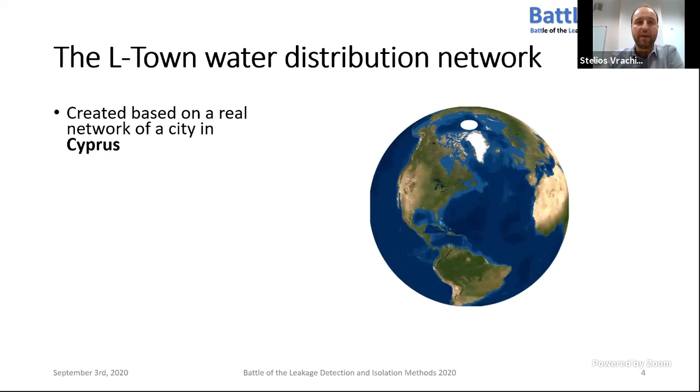I will begin with the description of the battle challenge, which concerns the L-Town, a water distribution network created based on a real network from a city in Cyprus. This network covers an area of approximately 10,000 people. It has 42 kilometers of pipe length, 2.6 by 3 kilometers width, several junctions and pipes, and for the purposes of the competition, the pipes were divided into 50-meter segments.

We have created the base demands of this network based on the real network. For each node, we assign the polygon in the real network, and we find the building area in this polygon. We then find the type of consumers by collaborating with the water utility for each building, and the base demand for each node is calculated by multiplying the percentage of this consumer type in the polygon times the consumption per building area of the consumer type times the building area.

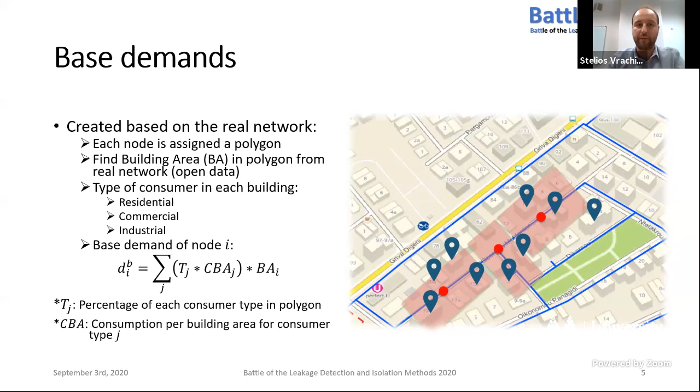The demand patterns were also created realistically based on the real network. First, we created 2 nominal patterns, a residential and a commercial, extracted from real data. However, each node was assigned a unique demand pattern by randomizing these nominal patterns as described in the LeakDB benchmark, which is cited here. We also assigned some industrial patterns which were derived from real AMR data.

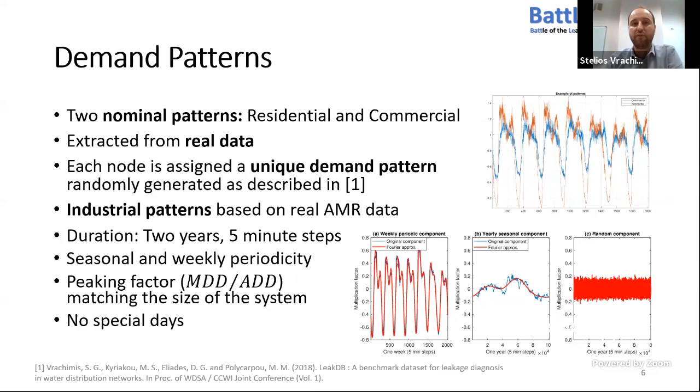The duration of the patterns was 2 years in 5-minute steps. We have a seasonal, yearly, and a weekly component periodicity. We also took into account the peaking factor, which is the maximum daily demand with respect to the average daily demand, so that it matches the system size. For this competition, we did not assign any special days in the patterns.

For the competition, we had a nominal model and a real network model. The real network was used for generating the data for the competition. The nominal model, given to participants as an EPANET input file, contains the available network information. The difference between the two models is that in the real model, the base demands were randomized uniformly between plus minus 10% of the real value.

The nominal residential and commercial demand patterns were available only in the nominal model. However, as we said, different patterns for each node were used in the real network, and also industrial patterns were not available. However, they are measured by AMRs. The pipe parameters again were randomized uniformly between plus minus 10% of the real value. For this competition, elevation and pump curve uncertainty were omitted to reduce problem complexity.

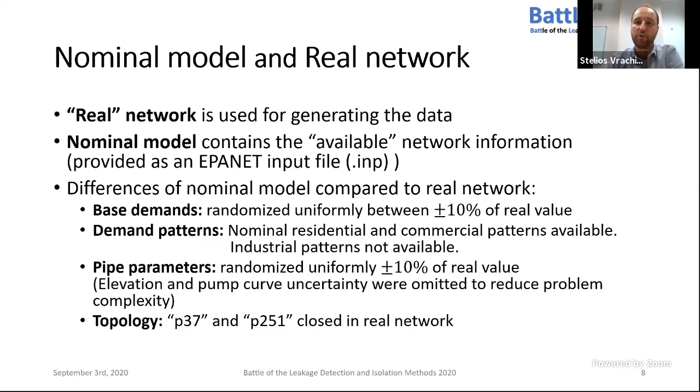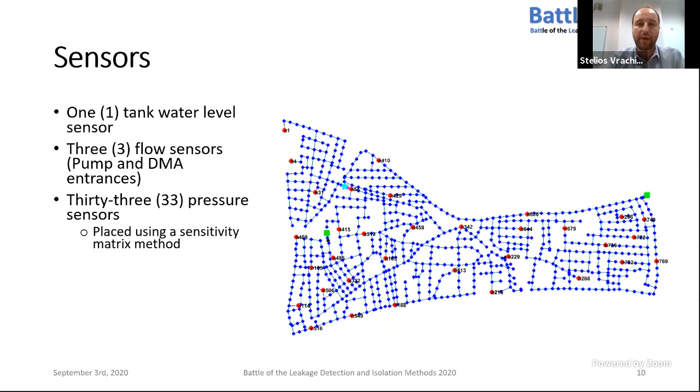The sensors assigned in this problem were one water level sensor at the tank, 3 flow sensors, 1 at the pump and 2 at the DMA entrances, and 33 pressure sensors shown in the figure here, which were placed using a sensitivity matrix method. We have also 82 automatic meter reading devices in area C, which were used to measure this area, and also the industrial consumers shown here in green.

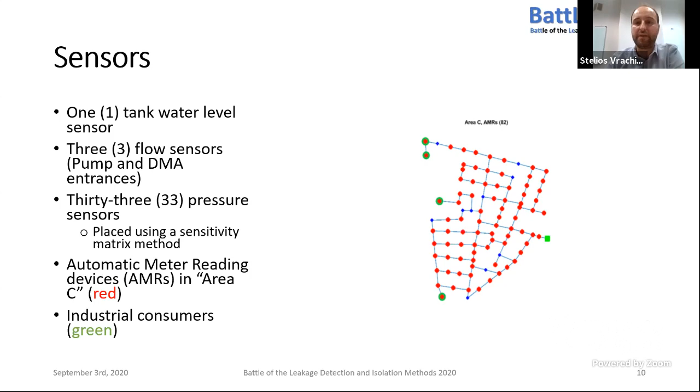The sensors give accurate readings with no time delay in order to reduce problem complexity. However, the readings were rounded to 2 decimal points, so this was adding some uncertainty into the measurements. We have 2 datasets, the historical dataset of 2018, which contains 1 year of sensor data, and also the time and repair location of pipe bursts that have been fixed by the water utility. The evaluation dataset, the one on which the participants were evaluated, contains only 1 year of sensor data.

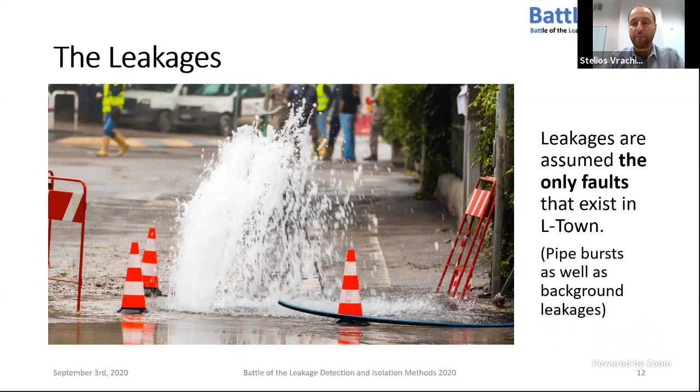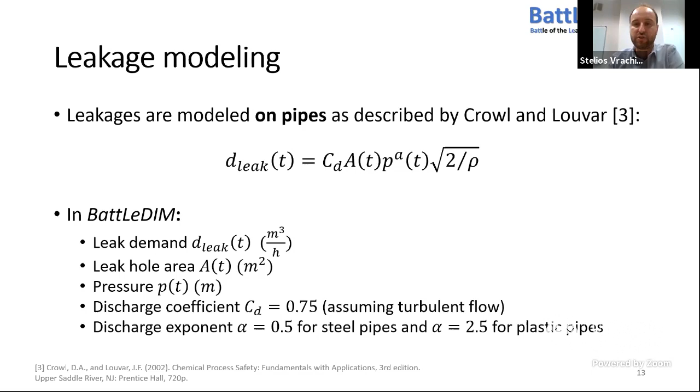There were 3 types of leakages categorized depending on their magnitude in the competition: background leakages, medium pipe bursts, and large pipe bursts. These were categorized based on their percentage of the average system inflow. Large and medium leakages, that is above 15 cubic meters per hour, were assumed to be detected and fixed by the water utility after a reasonable amount of time, with a maximum of 2 months.

Leakages were also assigned a time profile. There were abrupt leakages that begin abruptly and remain at their maximum hole value, but there are also incipient leakages, which increase gradually from their start time until a peak time, at which point the leak hole remains at its maximum value until the end of the leakage.

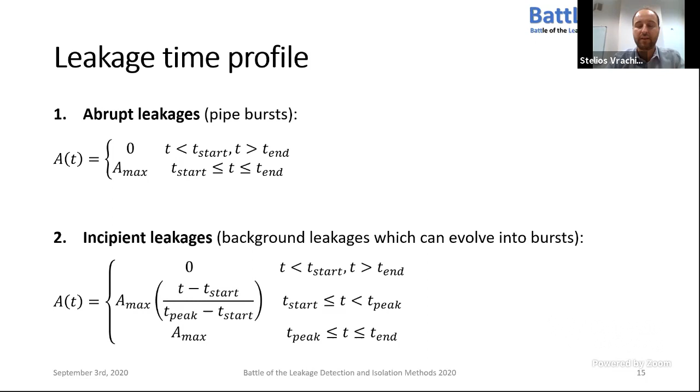For this competition, we used also a leakage placement algorithm, which places the leakages randomly, however, with some constraints. We place them constrained on the maximum number of leakages in a year, and also a minimum time between leakages which overlap. The leakages which overlap, meaning that the detection radius around the leak, which is from where the detection is considered successful, is 300 meters in this competition, and we assigned a minimum 2 weeks between leakages that overlap. This is to ensure separability of the faults.

Leakage characteristics were also selected randomly with constraints. That is, we have a predetermined number of background, medium, and large leakages, a predetermined number of abrupt and incipient leakages, where incipient peak time is selected based on the leakage type and magnitude.

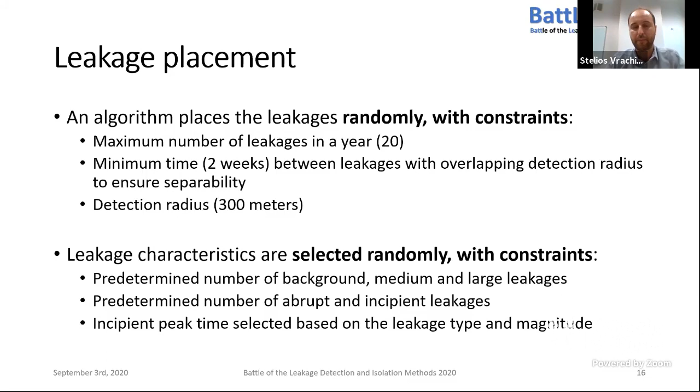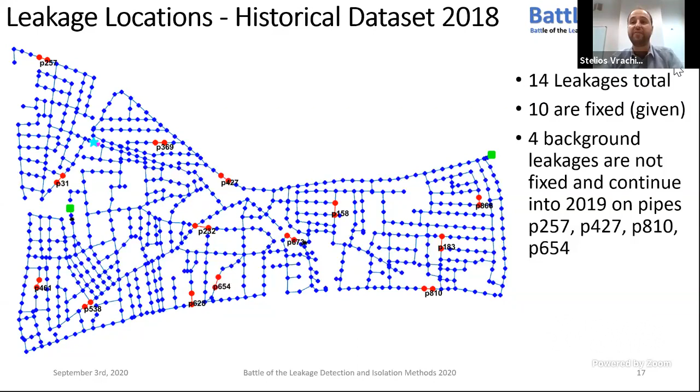Now we proceed to the evaluation dataset leakage locations. These are the leakages and the solution of the BattLeDIM competition. There were 23 leakages in total. 4 begin and continue from 2018, while 19 of them begin in 2019. All these leakages are evaluated in this competition, whether they begin in 2018 or 2019.

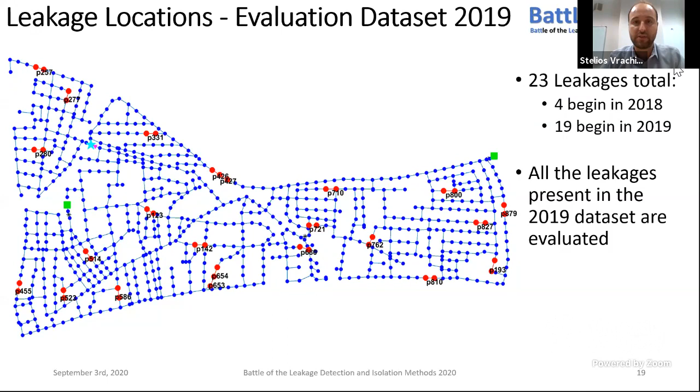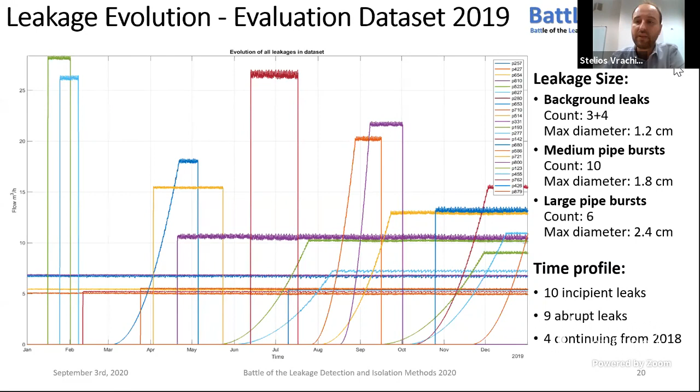In the next graph, we show the evolution of these leakages. We have leakages of different size, background leaks: 3 of them begin in 2019 and 4 of them continue from 2018. We have 10 medium pipe bursts, 6 large pipe bursts, and also the time profile of these leakages varies. There are 10 incipient leakages, 9 abrupt leakages, and 4 continuing from 2018, so they are continuous. We now proceed to the evaluation methodology.

For this competition, we follow a pure economic approach for evaluation of the participants. That is, the water utility of L-Town calculates the profit from water saved from successful detections. Also, the utility considers the cost of the repair crew every time it is sent to search for a leakage. We want to note that the selected methodology was chosen by the organizing committee as the most suitable for this competition. However, alternative methodologies have also been considered and will be described in a future journal paper.

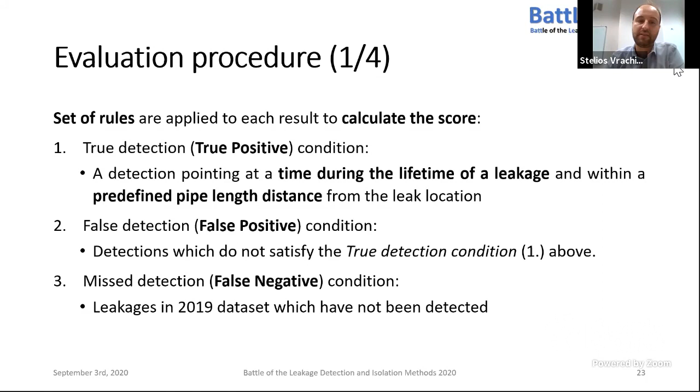A set of rules will apply to the results given by the participants to calculate the score. First, we define the true detection or true positive condition. A true detection is a detection pointing at a time during the lifetime of a leakage and within a predefined pipe length distance from the leak location. A false detection is a detection which does not satisfy condition 1. Missed detections are the leakages in the 2019 dataset which have not been detected.

The detections are evaluated in chronological order, that is, from the earliest detection until the latest detection given, and this is for the leakages that may overlap. Detections outside 2019 are ignored, so we do not penalize any detections that were given with a date not in 2019. Also, repeated detections of the same leakage are ignored, as we have cases where the same leak was detected multiple times. We only consider the first detection of this leak, and the rest of the detections are not penalized.

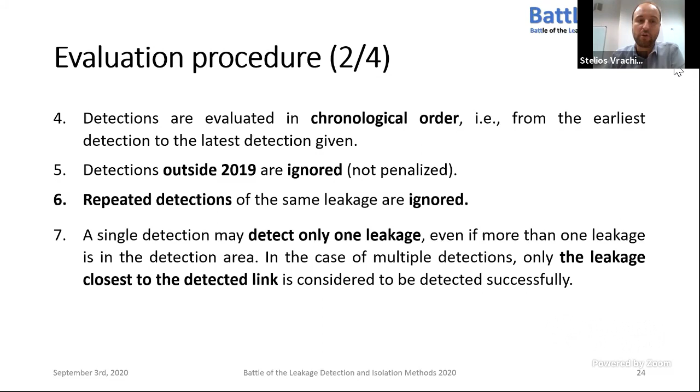A single detection may detect only one leakage, even if more than one leakage is in the detection area. In the case of multiple detections, only the leakage closest to the detected link is considered to be detected successfully. The profit from water saved from a detection is calculated by finding the volume of water saved from the detected leak, from the detection time until the end time of the leak. The volume of water saved is then multiplied by the cost of water per cubic meter to calculate the total profit per detection.

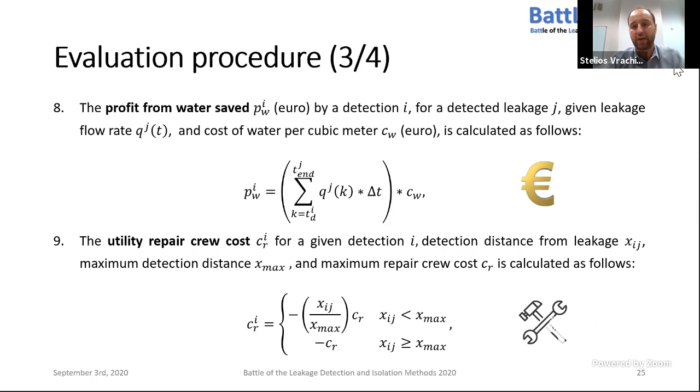Also, we calculate the utility repair cost for each detection. If a detection is not near a leak, then the full repair crew cost is assigned to that detection. While if a detection is close to the location of a leak, the utility repair crew cost decreases linearly with respect to the distance from the leak location. The score per detection is then given by adding the profit and the cost, and the total score for a given results file is calculated by adding all the scores per detection.

Here we show the evaluation parameters for the BattLeDIM. The max detection distance for a leak is 300 meters. That is, a detection that is 300 meters in pipe length from the leak location is not considered successful. The cost per cubic meter of water was chosen to be 80 cents of euro, and this is the typical cost of water in Cyprus, since the benchmark we have used is created from a network in Cyprus. And also the maximum repair crew cost was set at 500 euros, which is also the typical repair crew cost in Cyprus.

On the right, we can see an example of the evaluation function using these parameters, and a detection which is given here is assigned the corresponding cost or reward depending on the leakage location and time.

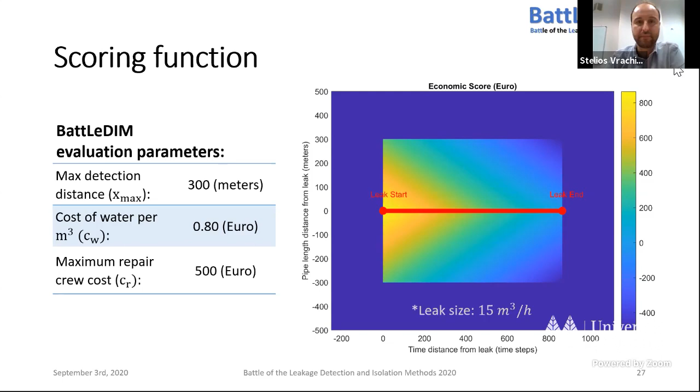The evaluation code is available on GitHub, and everyone is invited to go to GitHub, download the scoring algorithm, and test their results file themselves. If you have problems with the required software, that is MATLAB and the EPANET MATLAB toolkit, you can also run the evaluation algorithm online using Code Ocean. However, this may take a few days because we are pending approval from Code Ocean. More code will be available shortly. We'll make available in GitHub the code for the generation of the BattLeDIM network, the sensor placement code, and also the leakage placement code. Thank you for your attention.

I will now pass on to my colleague, Dimitrios Eliades, to announce the winners of the competition. Thank you, Stelios. Let me just change the slides now. Okay, so I think you can see my screen now. So it's time to announce the competition winners of the BattLeDIM 2020.

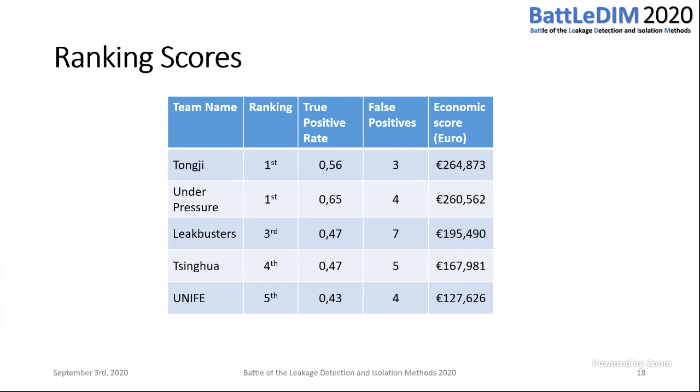You can see that the maximum economic score that was achieved was 264,000 euros. And you can see the results with the other teams. All the other participants will be able to evaluate their scores using the tools that my colleague Stelios presented before.

Now, let's proceed. Let's watch the presentations of the five winning teams. The presentations are also available on YouTube. They will also be available on the competition website, as well as on the conference website, in case somebody has trouble watching them on YouTube.

Now, please allow me to share the videos now. Just a moment. Share. I need to make some Zoom adjustments and to share the video.

Hello everyone, we are a team from Tongji University. We are pleased to participate in this battle, and we are honored to have this opportunity to share our method of identifying leaks in L-Town. I'd like to divide our presentation into 4 parts: background, methodology, highlights, and case study. First, I will start with the background.

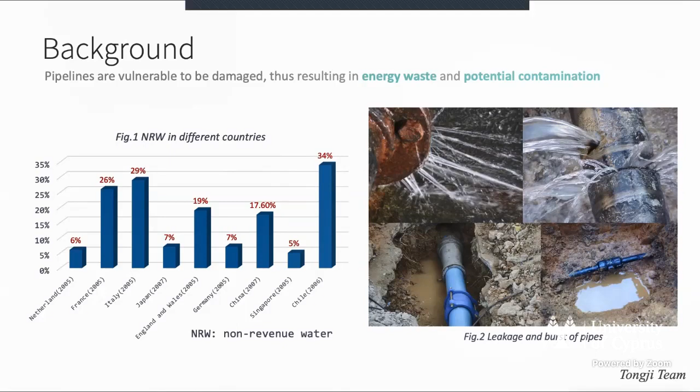In this research, we proposed a novel multiple leak detection and isolation framework, MLDIF. It contains 3 parts: calibration, identification, and isolation. A data module is also required. First, a gradient iteration algorithm was used to calibrate the hydraulic model after dividing pipes into several groups by the Dijkstra algorithm. Then we used STL decomposition and k-means clustering algorithm to identify the occurrence time of leaks.

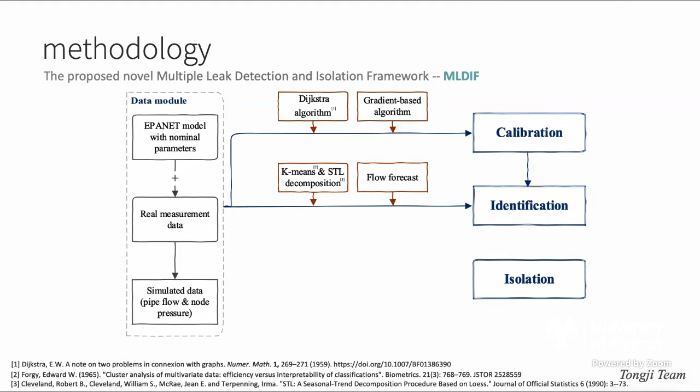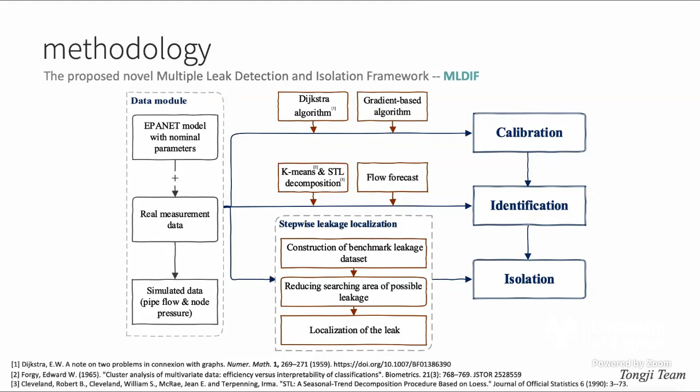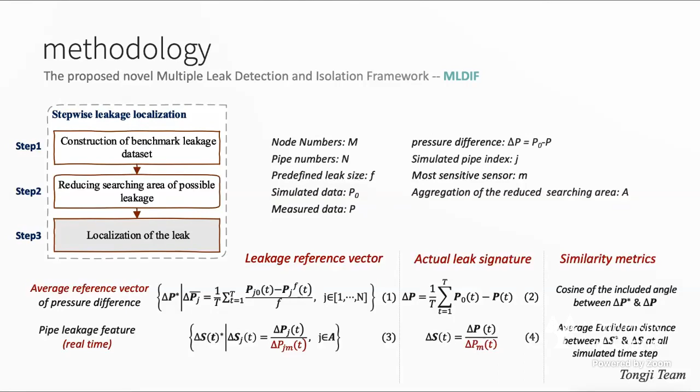In the last step, we performed hydraulic simulation for cases when the real-time leakage happens on each pipe obtained in step 2. The quantity of leakage can be estimated in the identification part. Then the hydraulic feature of pipe leakage at every time step can be computed by equation 3, while the feature of real leakage can be obtained by equation 4. By ranking the average Euclidean distance between delta S and delta S star, the most likely leaky pipe can be figured out. Compared with other leakage identification methods, MLDIF has 4 improvements.

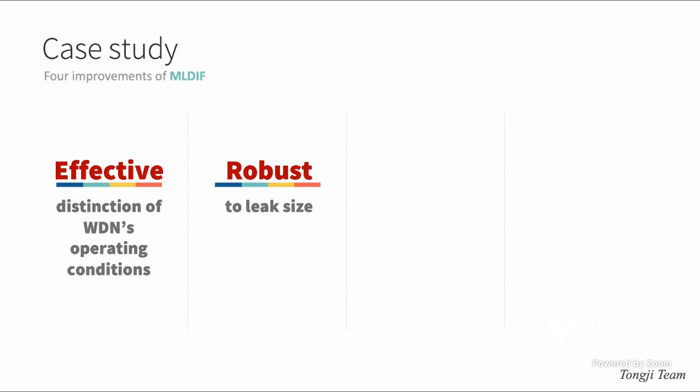First, it can effectively distinguish WDN's operating conditions with the help of the STL decomposition and k-means clustering algorithm. And it is insensitive to leakage size because the influence of the leakage size is removed after the normalization in equation 1 and 3. Therefore, this method is robust. Besides, due to the stepwise leakage localization and the search area narrowing step, MLDIF can accurately locate the leaky pipe in a short time.

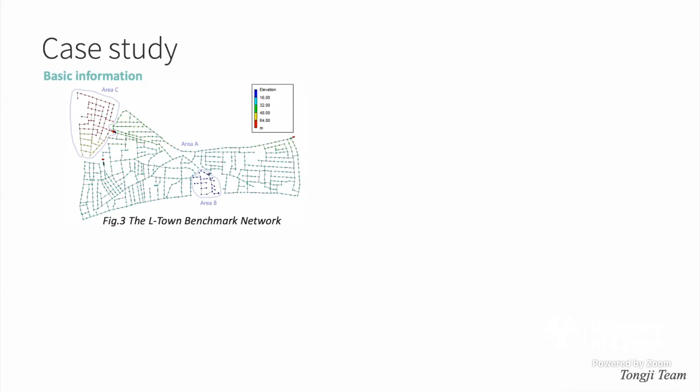Okay, now we move to the last part, case study. L-Town is a small hypothetical town receiving water from two reservoirs. A pump and a water tank have been installed in the inlet of Area C, and most of its nodes are monitored by AMRs. Since the water supply in Area C is relatively independent, we can separate it from Area A and B and identify leakages respectively.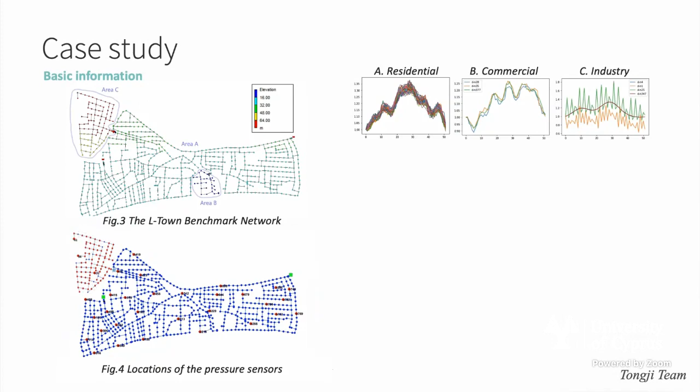According to the AMR records and the consumer types of the nodes in Area C, we can calculate the annual change of water consumption of each type. Then, with the help of the consumer types and base amount of nodes in the EPANET model, the total water consumption of each area can be predicted.

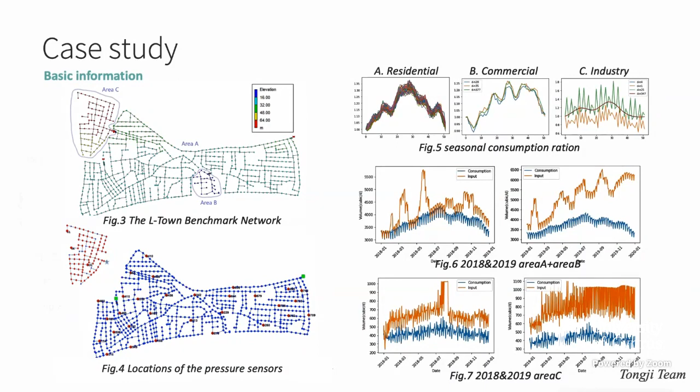With the well-calibrated model, we can simulate the leak-free conditions throughout the year, and combined with the measured data, we can calculate changes of pressure difference during the year. Then STL is used to decompose the time series into seasonal, trend, and residual components. Since the residual component cannot effectively reflect the incipient type of leak, we determined different leak conditions by clustering the trend part into different groups. The changes in LCI mean changes of the leak state.

Take the marked time period as an example. Combined with the water volume difference diagram, the amount of the leakage can be roughly estimated to be 25 cubic meters per hour, and the time range of leakage can be identified. Hydraulic simulation was carried out for this period, and the SPC method is used to accurately get the time when the leakage occurs. By performing similar analysis on the different leakage states throughout 2019, the start time of all the leakages can be obtained.

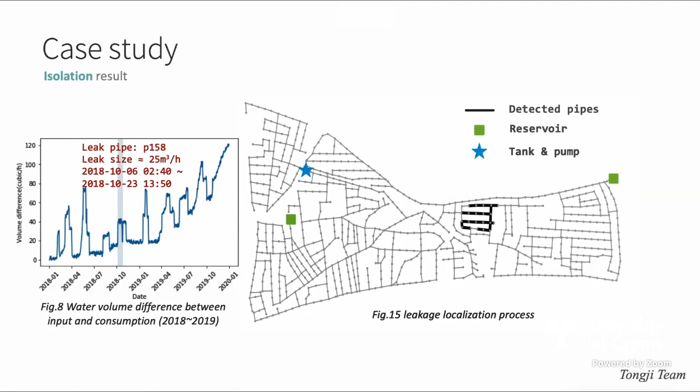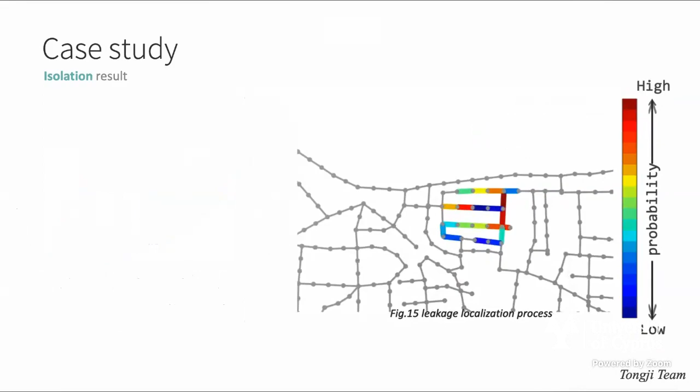First, the constructed leakage characteristics are used to narrow the range of possible leaky pipes. Then real-time simulation helps to get the most likely leaky pipes in 20 seconds. The topological distance from the pipe with the highest probability to pipe 158 is only 1, which is very small, and it proves the accuracy, efficiency, and good applicability of MLDF.

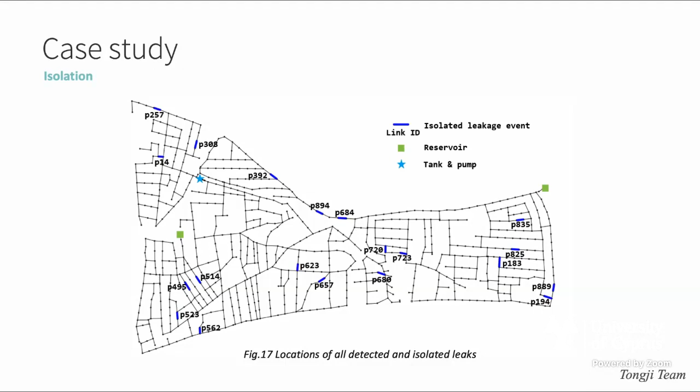When locating the new leakage in the next period, if the current leakage has not been repaired, this leakage should be added to the hydraulic model to construct a new, quote, leak-free model. Through the above method, the identification of multiple leaks is realized, and all detected leakages are shown in this picture.

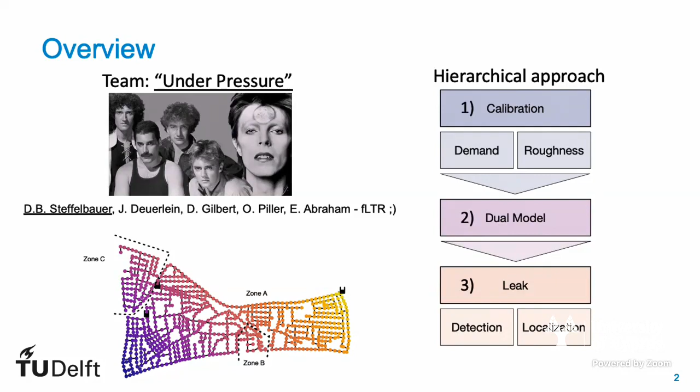To solve the leakage problem of the L-Town water utility, we have proposed a hierarchical approach to find the leaks in the 3 measurement zones. This presentation follows exactly this approach. First, we will start with the calibration of the network, both for demand and for roughness. Then I will introduce the foundation of our work, the dual model approach, which makes finding leaks tremendously easier. Last but not least, I will give an overview of our methods to detect and to localize leaks, which are both based on the dual modeling approach.

Let us start with the demand calibration. We focused on the AMRs in measurement zone C of the network and used time series analysis to identify the water usage behavior in L-Town. The idea is to subsequently infer the demand to unmeasured nodes in zones A and B according to the information from the previous water bills, which is contained in the EPANET input file.

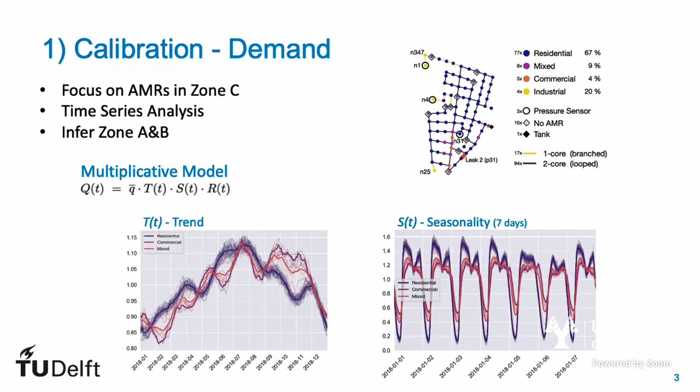It has to be noted that the industrial users follow the same model, although with different seasonal periods, which repeat with prime numbers of 7, 11, or 13 days. Since there are no industrial users in zones A and B, we were only interested in residential and commercial demand patterns. We stated the roughness calibration as a weighted least squares problem with bound constraints.

which was solved with the help of the Levenberg-Marquardt algorithm.

Additionally, our method allows us to compute confidence intervals for the roughness parameters based on first-order second moments. All groups resulted in very certain and reasonable roughness values. Groups 1 and 5 show bigger confidence intervals due to their small number of pipes and the fact that they are hydraulically not that influential in the system.

Now we get to the core of our idea to detect and isolate leaks: the dual model. In the dual model, the original pressure measurement nodes are connected by a valve with virtual reservoirs. The origin of the name dual stems from the fact that instead of using a fixed demand boundary condition, dual fixed heads are used. The heads of the reservoirs are set equal to the pressure measurements.

If a new leak appears in the system, the residuals between measured and calculated pressures increase. The pressure drop caused by higher flow velocities towards the leak in a real system is not observed in the model, which is still based on the leak-free system.

In the dual approach, the measured pressure drop is applied to the fixed head reservoirs, and as a consequence, an additional outflow is calculated. This outflow can be understood as an outflow residual. The advantage of the dual method is that the calculated outflows act as amplifiers that deliver significant and localized signals even for small pressure drops.

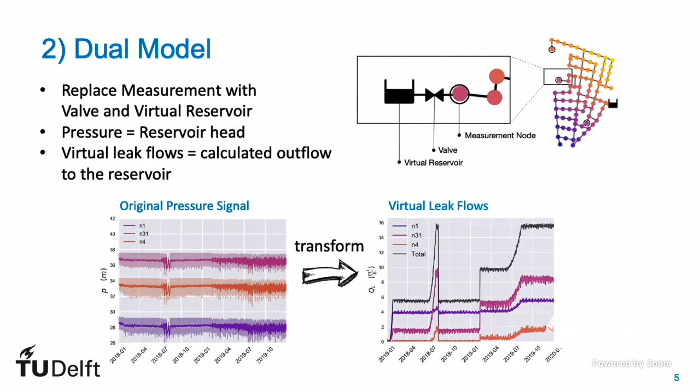For the leak detection, we make use of the dual model outputs, the virtual leak flows. As mentioned before, the leak signals are amplified by the dual model, whereas the noise levels are way smaller than using the original pressure and flow measurements.

The virtual leak flows show 2 different types of leaks that occurred in the system: instant leaks and growing leaks that saturate at a certain level, both shown on the right side. For the growing leaks, the increase over time was modeled with a quadratic function.

We used change point detection algorithms like CUSUM and the likelihood ratio method to retrieve first estimates for the leak start times. The input parameters of the algorithms were calibrated on small noise levels that were still remaining in the virtual leak flows. To retrieve even better start time estimates, we made use of Bayesian inference for single occurring leaks.

This Bayesian inference method used all flow and pressure measurement signals as input parameters to fit the identified leak shapes on the measured signals. With this method, we were able not only to retrieve confidence boundaries for the start times, but also simultaneously probabilities for the leak size as well as the pressure drops in the system.

If multiple leaks occurred at the same time in the system, this method had difficulties finding the right parameters. That is why we fell back on a simple genetic algorithm in the case of simultaneous leaks.

The virtual leak flows from the dual model were also used for finding leaks. The localization is based on the work of Perez et al., which used Pearson correlation coefficients between pressure residuals and sensitivity matrices. The difference in our method is that we are not using pressure residuals, but instead the residuals in the virtual leak flows, which makes the method way more stable and robust.

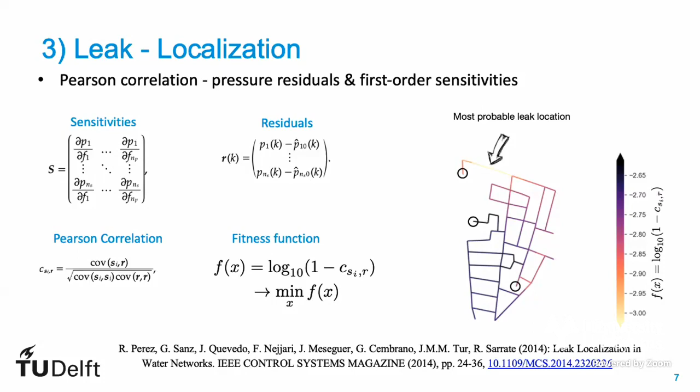On the right side you can see the fitness function values based on the correlations. The smaller the values, the lighter the colors of the pipes, the more likely a pipe is to be the actual leaky pipe. The last slide shows the results that we obtained with our method.

In total, the L-Town water utility has lost 665,000 cubic meters of water due to leaks in their system in the years 2018 and 2019.

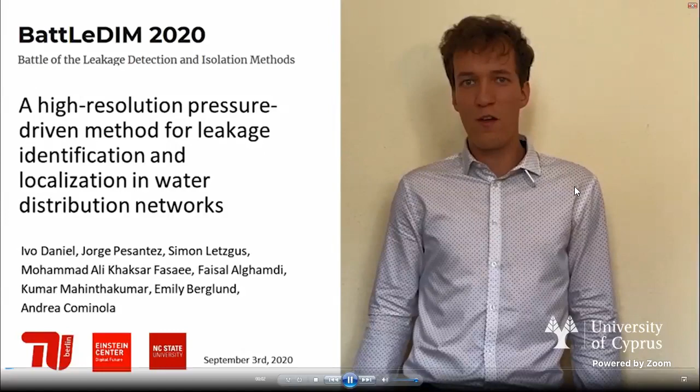Here in Germany for the presentation of our part in the BattLeDIM 2020. My name is Ivo Daniel from the Smart Water Networks Group at Technische Universität Berlin, and together with a group from the Department of Civil Construction and Environmental Engineering at the North Carolina State University, we developed a two-stage approach titled A High-Resolution Pressure-Driven Method for Leakage Identification and Localization in Water Distribution Networks.

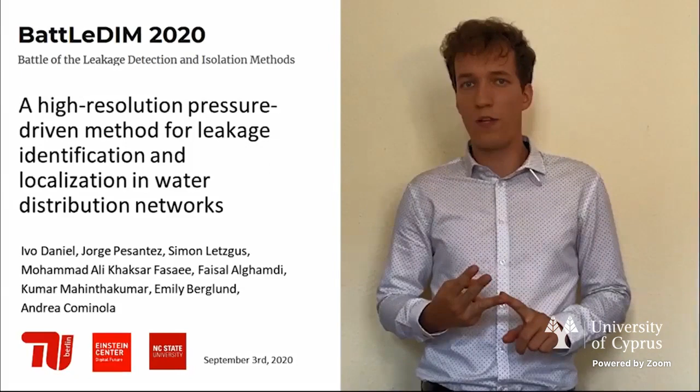Throughout this presentation, I will first briefly introduce you to our team. Then I will elaborate on the methodology underlying this work, followed by the presentation of the results, meaning the time and location of the leaks we found in the BattLeDIM dataset, and also a very brief discussion.

So let's start with the introduction of our team. To tackle the challenge of the BattLeDIM 2020, we decided to divide and conquer. The group from the Technische Universität Berlin focused their efforts primarily on the leakage identification part, whereas the group from the North Carolina State University focused their efforts primarily on the leakage localization part.

Now, starting this off, I want to provide a general overview of the complete process with the following flowchart. In the first step, we obtain the time series of the raw data or the SCADA data from the pressure sensor readings in a water distribution network.

This information serves as input for the leakage identification process and is used to build a linear regression model based on information from a normal state. The model is then applied to a state with a present leak and the reconstruction error is analyzed.

From this analysis, we obtain information about the most affected pressure sensor, which is then passed to the leakage localization method. In a further step, the leak start time is determined, which is also passed as information to the localization method.

Utilizing the information about the most affected sensor, the localization method provides, in a first step, the selection of several candidate pipes for the leak location. From these candidate pipes is then calculated, by successive linear approximation, the final location and magnitude of the leak.

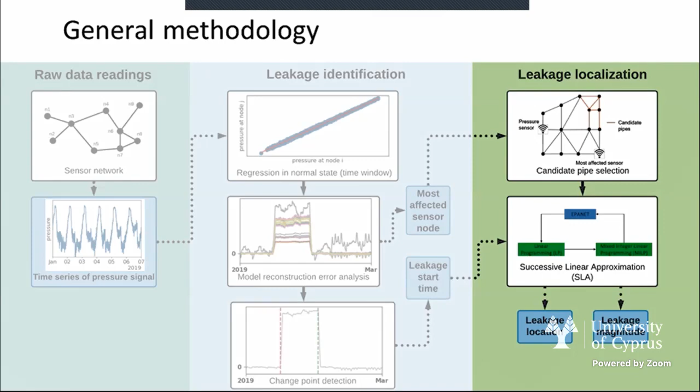Now let's step into the details of each individual part. For the leakage identification process, we built a linear regression model based on the pressures of all available sensors. This model is calibrated in the first step for a time window where ideally no leaks are present.

On the next two slides, I want to elaborate on how this linear model is possible and the derivation of the regression constants. The starting point to the regression is the Bernoulli principle as seen in equation 1, regarding energy levels at locations of sensor I and sensor J. As in this system, the pressure losses annotated for the respective nodes are calculated with respect to the supplying reservoir.

From equation 1, isolating Pi and Pj yields equation 2. This can be transformed to the linear regression in equation 3, with the regression constant c reflecting the geodetic height difference between the nodes and the parameter m reflecting the relation of the respective pressure losses to nodes j and I.

To analyze why this regression is possible, meaning why the expressions in equation 2 can be assumed constant, let's take a look at the term of the pressure loss divided by pressure for each node. In this term represented in equation 4, substituting the pressure at node I with the pressure loss relation of I and the reservoir yields the term on the right side. Now, assuming constant reservoir pressure and constant daily average pressure losses, the expressions in equation 2 can be equally assumed constant.

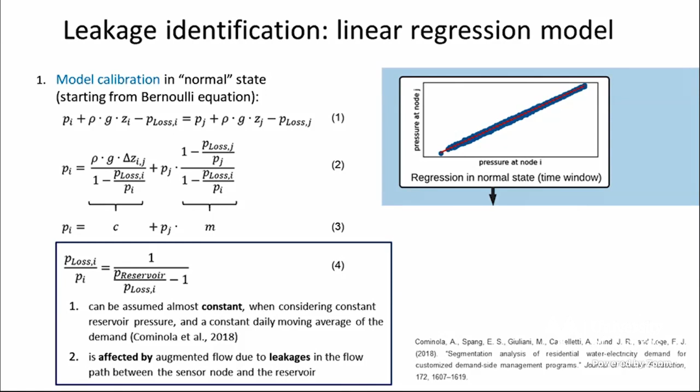In the second step, the model is applied to the time frame with leaks and the model error is analyzed. The first part of the analysis obtains the most affected sensor by the respective leak.

Assuming that a leak occurs in the vicinity of sensor I rather than all other sensors J, the reconstruction error of these regression models will result positive, as the increase in pressure loss at node I that are caused by the leak is greater than the increase at all other nodes J.

The information of the most affected sensor is then passed on as input to the leakage localization method. In the final step, regarding the current evolutionary stage of the method, the change point is detected by visual inspection.

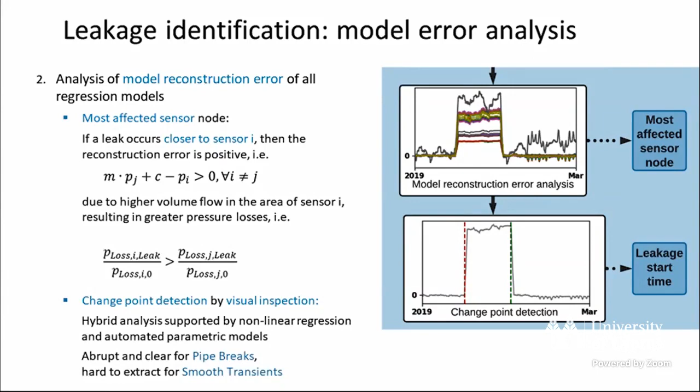This analysis was very straightforward for pipe breaks, as they caused abrupt change points and clear mean shifts in the signal, whereas gradually increasing transient leaks do not show an abrupt change point, but rather a trend change, which was a lot harder to pinpoint in time. The information of the leak start time is then also passed on to the localization method as input.

The pressure difference caused by the leak is calculated with the observed pressure from the n number of sensors in the network and the simulated pressures for the same locations under no leak conditions. Initially, leaks are inserted into the system at a number of m candidate pipes, and subsequently the leakage magnitudes are optimized using successive linear approximation to minimize the L1 error.

The first step in this process is to select the m number of candidate pipes where the leak might have occurred. As a starting point to the selection, the most affected sensor from the previous step is taken, and the pressure difference that was caused by the leak is calculated for all pipes and then sorted descendingly by magnitude. The top 50 from this list are selected for further consideration, where the reduction to a number of 50 was derived after analyzing the dataset from 2018.

Finally, for reasons of computational effort, from the initial set of 50 candidates, a reduced set of 10 to 15 pipes is sampled to obtain the final m number of candidate pipes. In a second step, the final leak location for all candidate pipes is calculated by successive linear approximation using a combination of linear programming and mixed integer linear programming.

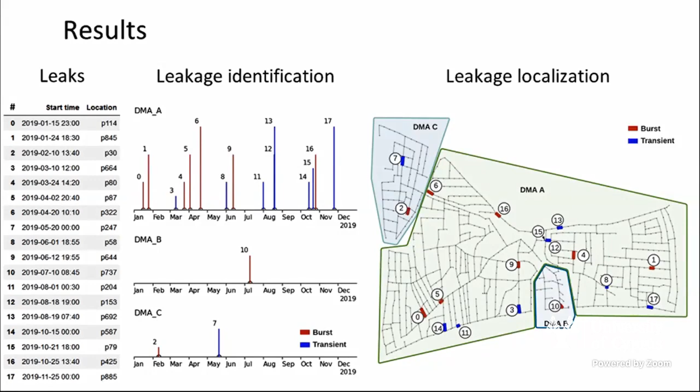The timeline chart illustrates that all leaks were fairly spread throughout the year. In this chart, the red lines annotate bursts or pipe breaks, whereas the blue lines annotate transients or progressing leaks. The colors are transferable to the map on the right, where the locations of each leak can be spotted. To illustrate the functionality of the method, we provide the example of the first leak found in 2019.

In the leakage identification step, the produced reconstruction error signal from the model is shown here. During the first period, until January 15th at 11 p.m., the signal is steady around the 0 line. After that, a clear mean shift can be observed, indicating a pipe break. The figure also indicates that the apparent leak was fixed on February 1st at 9:55 a.m., as the signal indicates that the network returns to its previous state.

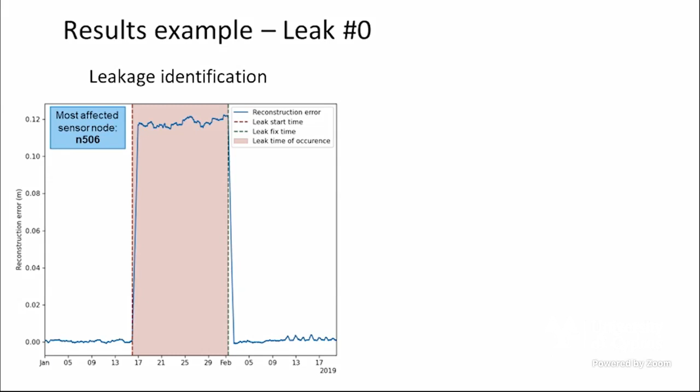The leak start time at January 15th, 11 p.m., and the most affected sensor node at node 506 are then passed to the localization method. Starting from this information, the candidate pipes are selected as shown in the map on the right, which represents the bottom left corner of the L-Town network. From the candidate pipes, the SLA algorithm then indicates that the leak has occurred in pipe 114, marked in blue on the map.

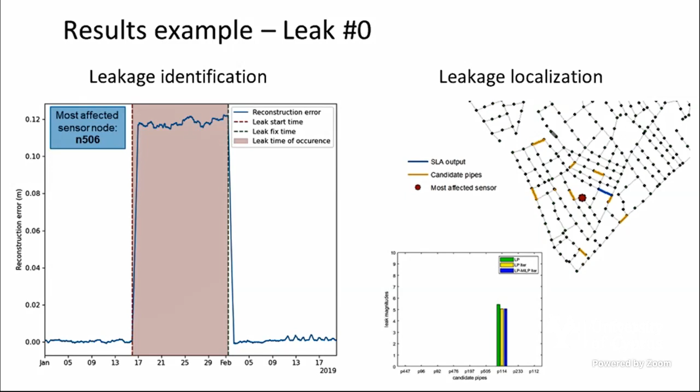Finally, I want to point out some of the challenges that we faced when applying our method along this competition. Firstly, during the process of leakage identification, unsteady supply pressure conditions in DMA-C due to the pump and tank operation rendered the application of the regression method unsuitable. Instead, we needed to fall back to analyzing the mass balance, which was possible as in DMA-C 82 out of the 92 nodes were equipped with AMR technology.

Also, as we mostly rely on visual detection of leakage start times, smooth transients caused real difficulties, as the transient to the leak state was rather smooth. On the side of the leakage localization, the model error inflicted in the EPANET model is crucial to the accuracy of the algorithm, and the 10% error introduced for this competition already presented a challenge.

Additionally, data for the seasonality of the demand was not available throughout the entire network, but was needed to calibrate the model. Therefore, the available data from DMA-C was extrapolated to adjust the demand of DMA-A and B. Better availability of the demand data would help in increasing the accuracy of the method.

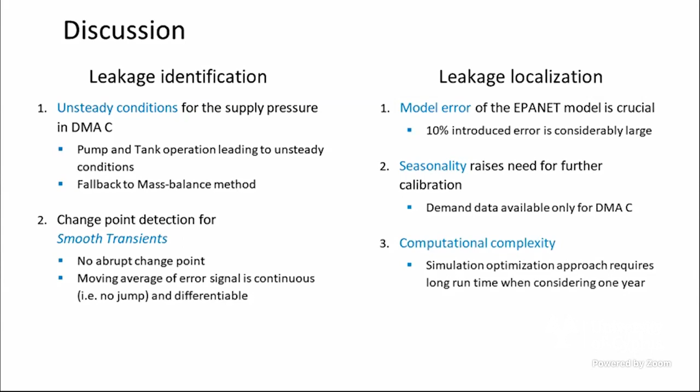Lastly, the simulation optimization approach is computationally expensive, especially when needing to run for an entire year. This limits the level of detail in which the SLA algorithm can be applied. Specifically in this case, the number of candidate pipes needed to be sampled to achieve results in an acceptable amount of time.

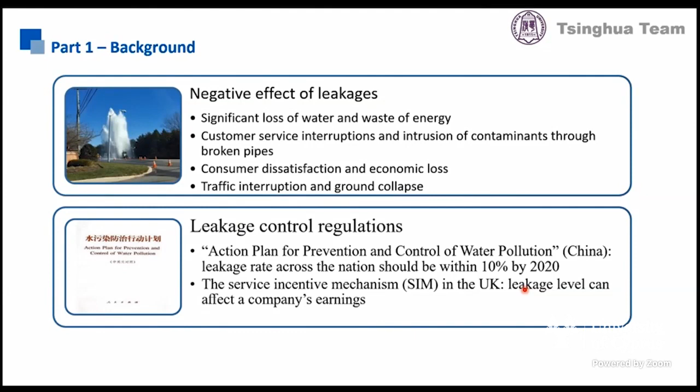As we all know, there are a lot of negative effects associated with leakages, and a lot of countries have regulations that request water utilities to detect leakages as soon as possible. One of the main problems that we face in leak detection is that we need to detect and isolate them really early. So, the main part of our research is how to reduce the time associated with detecting and isolating the leaks. Operating experience has shown that hydraulic model and district metering areas are useful to control leakage.

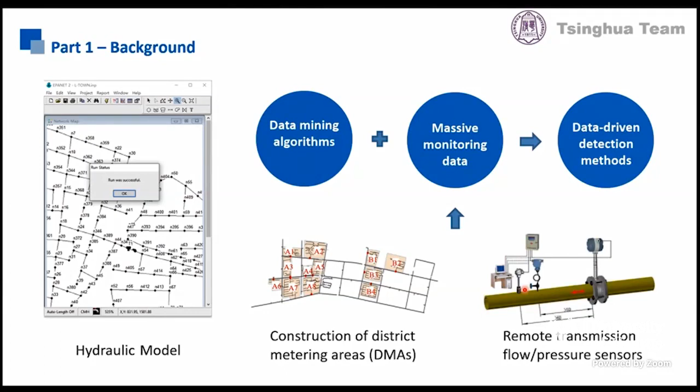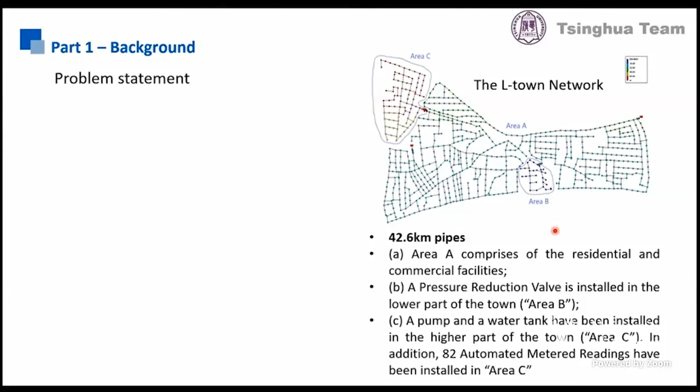Focus on the BattLeDIM. The L-Town network with hydraulic model and sensors are given in this battle. The challenge for L-Town water utility is how to detect pipe leakages as fast as possible over time. In short, 3 questions need to be solved. First, how to extract the leak-induced signals. Second, how to identify the type of leaks. Third, how to localize the leaks.

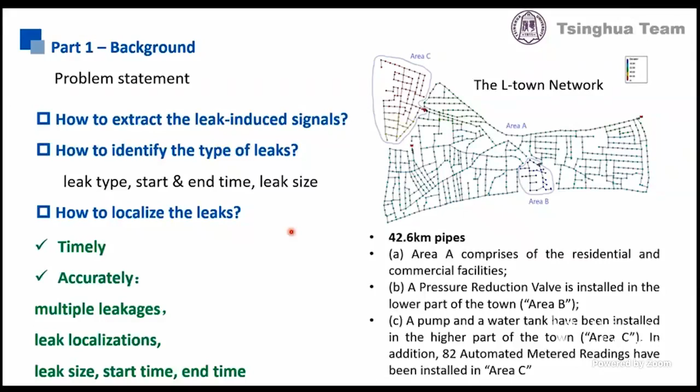To address the problems, we developed a novel EILF method for multiple leakages detection. Let's see how the method detects leaks. The method consists of 3 steps. First, estimation of flow and pressure. Second, identification of abrupt and incipient leakages. Third, isolation of pipes with leakages.

Let's see more details. As described in the L-Town problem statement, the water utility has set up pressure and flow sensors at a few predefined locations in the network. Time series data collected from these sensors are provided. The variations in the pressure and flow data are caused by daily, weekly, and seasonal water usage patterns, leakages, and other uncertain factors. To facilitate the identification of leak-induced data from the time series, flow and pressure caused by the users are estimated by data-driven time series methods.

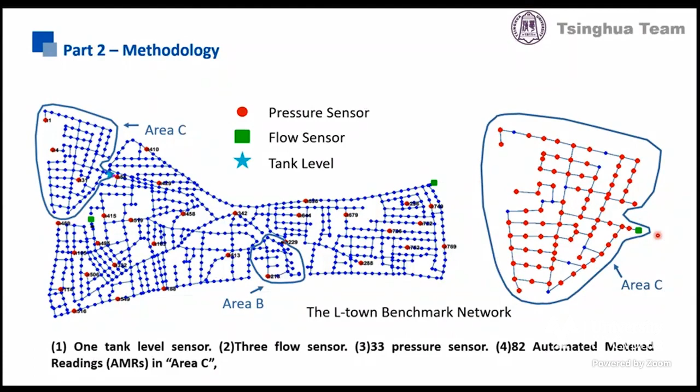It's assumed that the demand is composed of trend items, periodic items, and random items. Then, we use empirical mode decomposition to extract the time series items. The EMD can decompose the original signal by subtracting the intrinsic mode function successively. The trend items in demand mode can be represented by one of the IMFs. This trend item represents the annual change mode in water consumption in Area C or Area AB.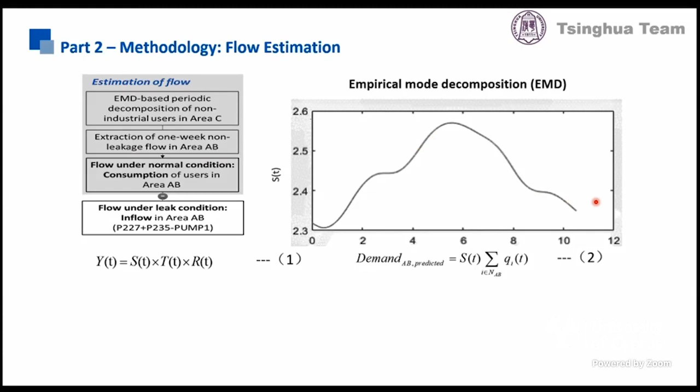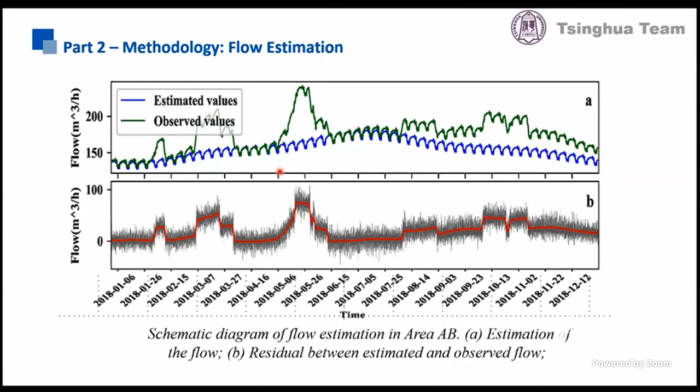Thus, the estimated value of water consumption in the Area AB can be calculated by equation 2, where qi(t) represents the demand at node i, which is obtained through the hydraulic model. NAB represents the node set of region AB. As shown in the pictures, the blue line is estimated values using our method. The gray line is the residuals between estimated and observed flow.

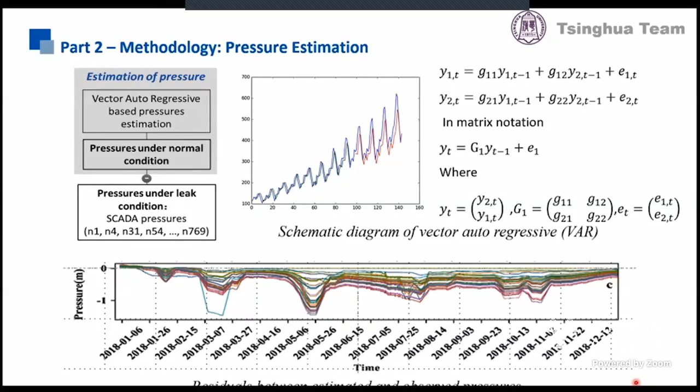For pressure estimation, the vector auto-regressive model is suitable for multivariate time series prediction. The periodic pattern of the original series is firstly removed and serves as the input of the VAR model. Then, we use the residual between the estimated value and the original series to identify the leakages. Because the leakage is an unpredictable event, the residuals will increase when a leak happens. Residual is still a time series with irregular fluctuations.

In order to reduce the non-stationarity of residual series, first difference and weekly difference are calculated to make the data smooth. The leaks are divided into two types, abrupt and incipient. The abrupt leaks are identified through difference transformation. 3 sigma SPC limit is used to identify the sudden increase and decrease of the flow curve. Therefore, we can obtain the size, start time, and the end time of leaks.

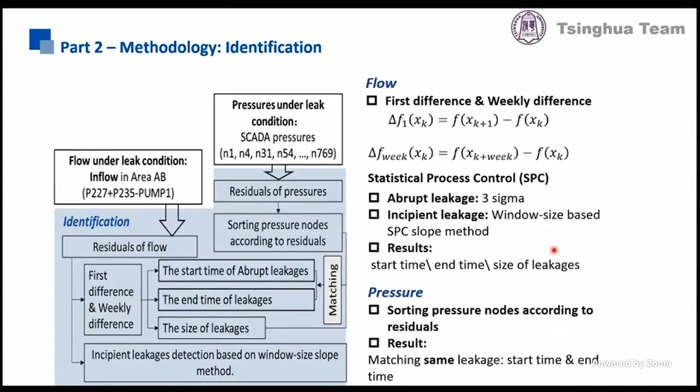There is one more thing to figure out. How does this start time match the end time? The equality of the variation of the flow is used to match the same leak. A complementary method to address this problem is to sort the pressure nodes residuals. For incipient leakages, a window size-based SPC slope method is employed to identify the incipient increase in flow residuals. For localization, we use the idea of control variates to localize each leakage for area AB.

We find 2 weeks, one with the leak and the other without the leak. Then, making a difference between the observed pressure data at the corresponding time in the 2 weeks. Grid searching is conducted for nodes and emitter coefficient in EPANET simulation, and calculate difference between the simulation pressure results as before. Finally, MSE of 2 differences is used as evaluation function for this problem. We could find high probability area of leakage with low MSE value.

Now, let's see the detection performance of this EILF method. Through difference transformation, the abrupt increase and decrease are easily identified by 3 sigma SPC method. Besides, we sort the pressure nodes residuals, as shown in the second figure. A sudden increase in pressure will lead to an increase in the residual between the current value and its moving average. The variation of the pressure at the neighboring nodes will be higher than more distant nodes.

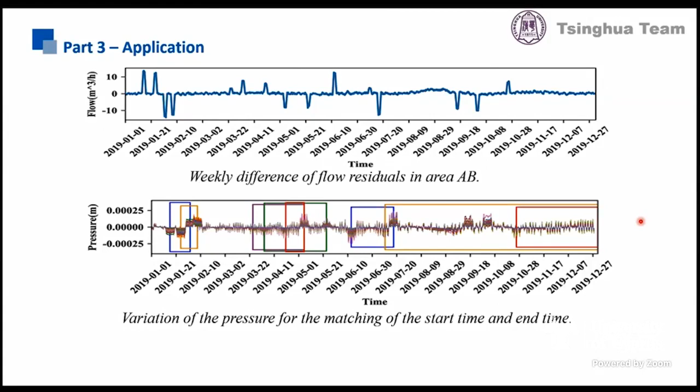The birth and fix of a certain leakage will cause similar patterns for the neighbor nodes and the distant nodes. By observing the pattern at each start time and end time, a matching could be done. Therefore, 9 abrupt leaks are detected in the BattLeDIM networks in 2019.

For incipient leakages, as shown in the tables, 7 incipient leakages are identified by window size-based SPC slope method. However, the peak of each unfixed incipient leakage is hard to be determined because of the overlap of different incipient leakages. Therefore, an approximate peak time is given for each incipient leakage.

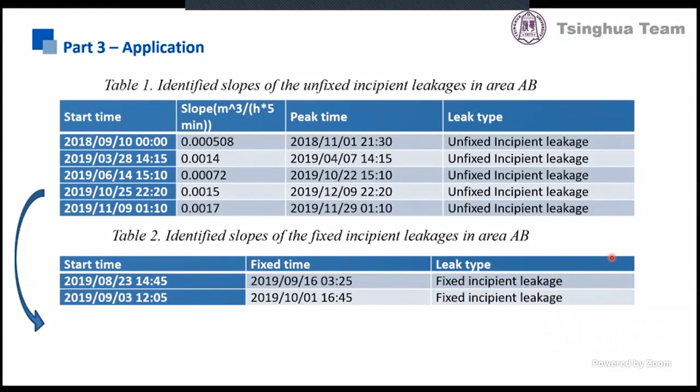Now, let's conclude with some highlights of the methods. Applying the EMD and VAR, accurate estimations of flow and pressure under normal conditions are used to extract leak-induced values from the monitoring data. Rather than analyzing original pressure and flow signals directly, this study extracts key burst characteristics, reduces the impact of diurnal variations, and provided a better solution for leak detection.

Second, weekly difference is calculated to reduce the non-stationarity of residual series, which is used for leak detection. We also use the weekly difference idea to design the objective function for localization searching problem. This approach improves the ability to deal with uncertainty. Third, the equality of the variation of the flow residuals and the sorting of pressure nodes are used to match the start time and the end time of an abrupt leakage.

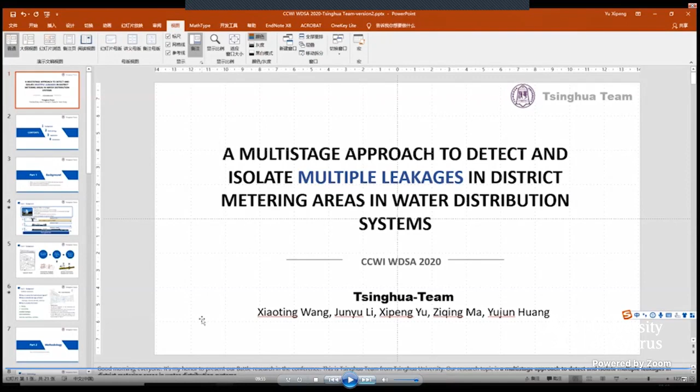We are Valentina Marsili and Filippo Mazzoni, PhD students from the University of Ferrara in Italy, and we are going to present our work for the battle of the leakage detection and isolation methods developed in collaboration with Professor Stefano Alvisi and Marco Franchini from the same university.

Several approaches for leakage detection have been introduced in the last decades, differing in terms of data collected in field and the adopted numerical approach. We developed a methodology which includes the use of pressure and flow data and consists of a pragmatic approach based on the use of hydraulic simulation model and the comparison between simulated and observed data. In particular, the method consists of two phases. In a first phase, the model is calibrated in order to realistically represent the behavior of the network. This was a fundamental step to have at disposal a reliable tool for leakage identification.

In a second phase, leakage start time and location are characterized. For each of these phases, a specific subset of pressure and flow data time series is considered. Concerning the L-town dataset, the two periods for model calibration and leakage identification are represented by year 2018 and 2019 respectively.

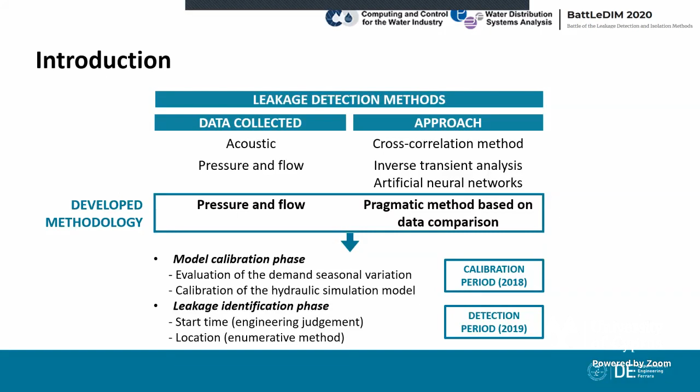As far as regards the model calibration phase, a first step included the evaluation of the demand seasonal variation, that is, the adjustment of the average weekly demands provided in the model. From an operational standpoint, a set of seasonal multipliers were evaluated for the L-town network by analyzing the demand data smart metered in a part of the network. The result of the demand adjustment operation showed the highest demand between June and August, in accordance with the fact that the network is located in the northern hemisphere.

The second step included the obtainment of the leakage time series for year 2018 and the identification of the periods without leakages or including the ones reported in the 2018 leakage report. These periods were then used for hydraulic simulations, and the resulting pressure and inflows were compared against the observed ones. The differences between simulated and observed data were then minimized by adjusting pipe roughness and diameter in order to calibrate the model.

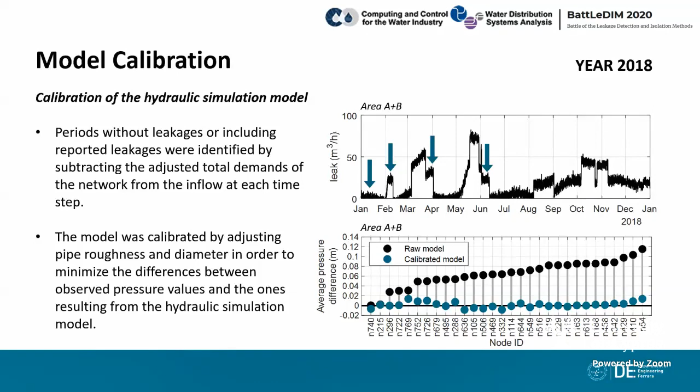Operatively, we used the dynamic link libraries of EPANET version 2.2 applied to the MATLAB programming software to perform the hydraulic simulations. We would like to remark that these two steps of demand adjustment and model calibration were a fundamental prerequisite for the subsequent operation of leakage identification and required the majority of the time for the application of the methodology.

The model calibrated with 2018 data was then used to detect year 2019 leakages in time and space. Specifically, regarding the number of leakages and their start time, the L-Town leakage time series was obtained. The engineering judgment was then used in order to identify the time of leakage formation and repair. This was done by considering the main positive and negative variations in the leakage time series. In addition, a time interval in which each leakage kept steady or gradually increased was visually identified.

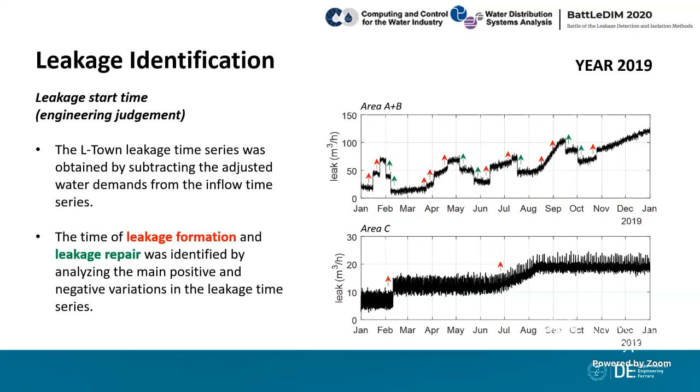The above process was adopted to temporally and spatially identify each leakage affecting the L-Town network in year 2019. It is worth noting that the leakage history was built gradually and iteratively, sometimes by also considering the pipelines adjacent to the optimal one. Several scenarios were then considered, and the history related to the global lowest error was selected in conclusion. The method allowed to identify a total of 14 leakages. 11 leakages were found in Area A, 1 was found in Area B, and the remaining 2 were observed in Area C.

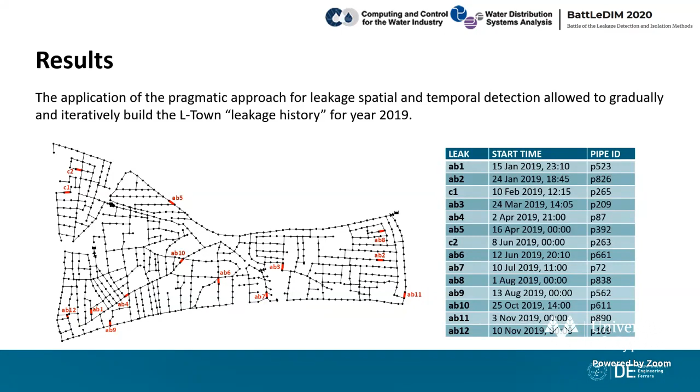To sum up, a pragmatic approach for leakage detection in space and time was introduced and applied to identify the leakages affecting the water distribution network of L-Town. The approach is simple and transparent, and it allowed to identify the leakage history only by relying on pressure and inflow data observed at each sensor and the iterative use of the hydraulic simulation model. However, it is worth highlighting that the performance of the method depends on an accurate estimation of the water demand in the network. In addition, since observed and simulated pressure are here compared, a well-calibrated model is essential to avoid leakage misclassification.